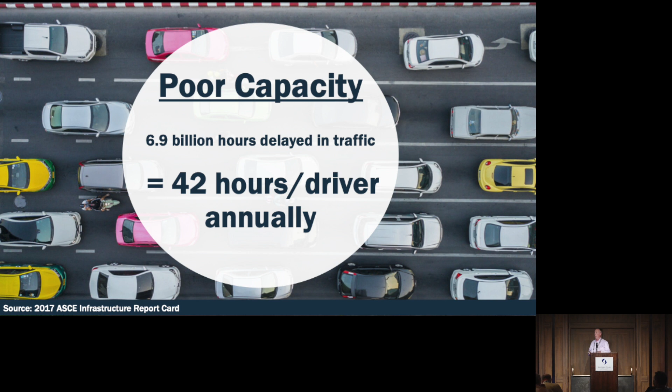According to their research, the average driver spends a little over 40 hours a year stuck in traffic. And I can tell you, I live in the Boston area. It's at least double that there. And the other thing that came out of their research is the average driver is spending over $500 a year on operating costs and vehicle repairs as a result of rough roads. And again, in Boston, it's probably double that. So as transportation professionals, and all of us in this room, I think we should consider ourselves transportation professionals, we need to be thinking about what can we do to change this awful scorecard and this awful grade.

So what are the solutions? Easy to talk about problems. What are the solutions? Certainly one of them, no big surprise, it's going to take a lot more money than what we've been spending. We've underinvested on maintenance. And not much any of us in this room can do about that other than pay our taxes. A lot of those decisions are made by politicians, and we can lobby and do whatever we want, but ultimately our elected officials are going to decide on how much money to allocate. But the one thing I think every one of us in this room can do is do what we can to try to spend what limited funds we do have more wisely.

And what do I mean by spending our funds more wisely? Well, from my perspective, and I think probably a lot of us in here would agree, if we do more preservation, more recycling with a good network optimization, pavement management approach, undoubtedly we're going to end up with better roads for the same or less money. So why isn't there more preservation and recycling? It's a simple solution. All of us in this room know that's the solution. Why isn't there more going on?

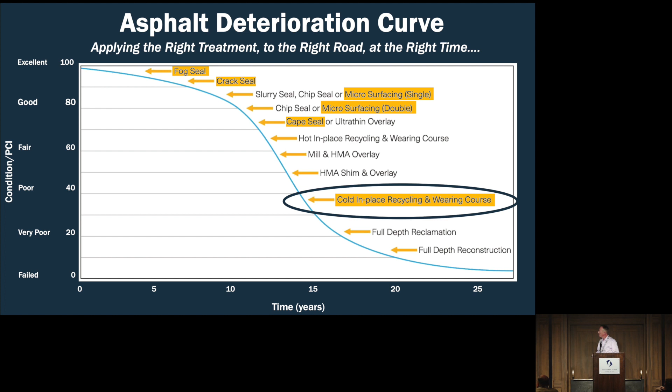And there's a strong tendency to jump right in, digging into researching treatments. But a couple of recommendations before you do that. The first thing, and again, Dr. Brahm, I think, alluded to that. If you go to the About Us tab and click on this Data Methodology tab, you will learn from that tab that the data pre-populating the website and used in a lot of the interactive calculators is data that was collected in a survey in 2017

for 2016 project costs on what we called medium-sized projects, 100,000 square yard jobs for preservation, 50,000 square yard jobs for recycling, with average life extensions. So that's the average data that's pre-populated on the website. That average data probably does not apply to you if you're an agency person, or any of your clients if you're a contractor person.

So it's important to get the most benefit and value from this website to go in and customize it to your region and your costs and life expectancies. We all know that a chip seal in Minnesota or Montana probably is not likely to last quite as long as a chip seal in Mississippi. And the costs are going to be different as well. So we need to make those adjustments. Really easy thing to do.

Go into this, click this tab, create a profile. All you need to do is enter your email address, a password, I think, and what will pop up is this database. This database is a long, long list of pre-populated treatments, and the 3 columns left to right. The first one is unit cost. You can either do US dollars per square yard or Canadian dollars per square meter. So north of the border, you've got that capability.

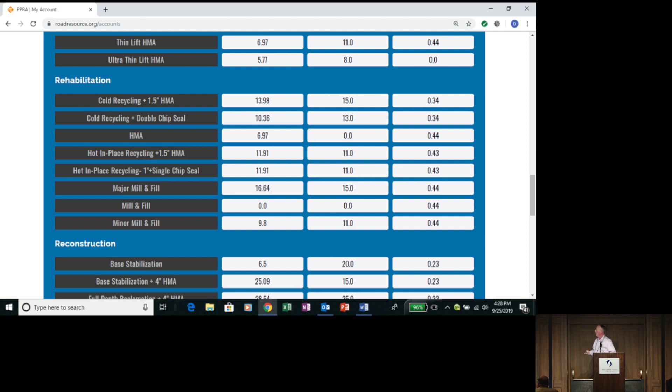They come back to us year over year because they understand the value of the treatments and they just use them year over year. So rather than sell treatments, we try to educate and encourage people to have optimized pavement management plans. And Dr. Brahm touched on it earlier. We have 4 or 5 different network optimization tools, really simple math, easy to use tools. My personal favorite, like Andrew's, is the remaining service life calculator. And I'm going to take you through it real quickly here. Hopefully I don't put you to sleep doing it.

But I'm going to make a bold statement before I jump in. If we can get every agency in this country using this remaining service life calculator every year, the roads are going to get better. I guarantee you. It's a light bulb. It's an eye-opening moment for people when they do this. And let me show you why real quick.

All you need to do to use this calculator is plug in those top row of white boxes, the lane miles in the network. So in most towns in Massachusetts, there are about 100 centerline miles of 2-lane roads. For this example, I plugged in 200 lane miles. Average pavement width in most cases is about 12 feet. And then a budget, for conversation's sake, I've thrown in $1 million here.

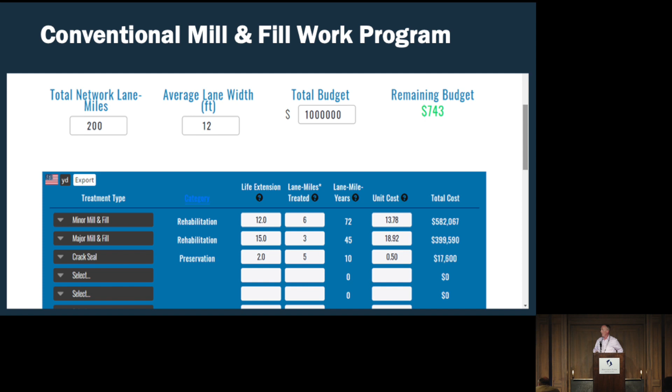So we're a mill and fill market like many others. So for this example, I put in 6 lane miles of minor mill and fill, 3 lane miles of major mill and fill, and with a little bit of money left over, I put in 5 lane miles of crack seal. And I spent down my $1 million budget to only having $743 left. Now, the real power in this calculator is what I'm going to show you next.

Every year they're gone. So if you want that network to break even and not decline, you've got to put 200 lane mile years of new life in. That spending plan that I just showed you, all mill and fill, only added 127 lane mile years, so we lost 73. You can get away with that one year here, one year there, but if that's what you're doing year after year after year, the network's declining.

And how easy is it to illustrate it? Even a politician could understand that. That's the power of this tool. Great communication tool. We need to get everybody using it. So then what we do after they've had this eye-opening moment, realizing, oh my God, I'm digging a hole year over year over year, we go back into the calculator and play around with it a little bit.

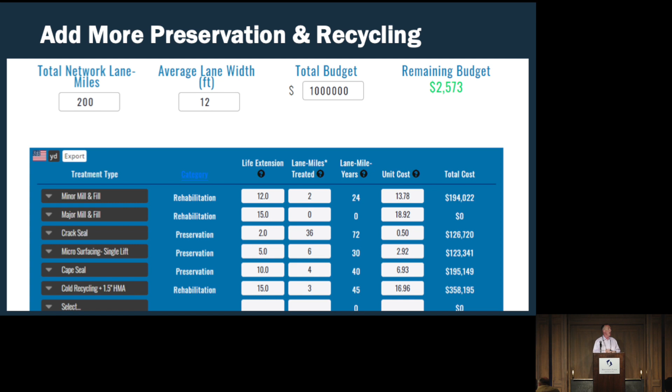So what I did here is I cut the minor mill and fill miles to 2 from 6. I took out the major mill and fill altogether and put in a CIR project. Surprise, surprise, right? We're CIR contractors. I added to the crack seal program, and then I also threw in some microsurfacing and cape seals, and I spent down the same $1 million budget, but now look at the results of this program.

Roughly a 45-55 split between preservation and rehabilitation, but look at the lane mile years. We have a net surplus of 11, so that network is almost a break-even year, slightly positive, but it didn't go backwards. That's what you're looking to do with this calculator. So play around with this with your agency people. Again, it's such a simple tool to use, and how powerful is that?

So the agency guys, you've shown them that, and we played around with some of the other network optimization tools, and they might say, well, you're talking to me about some treatments that I've never tried before. How do I match up the right treatment to the right road? I know that's key to pavement management success. We can't put the wrong treatment on the right road. And you say, well, let me show you a couple of ways you can do that here from this website.

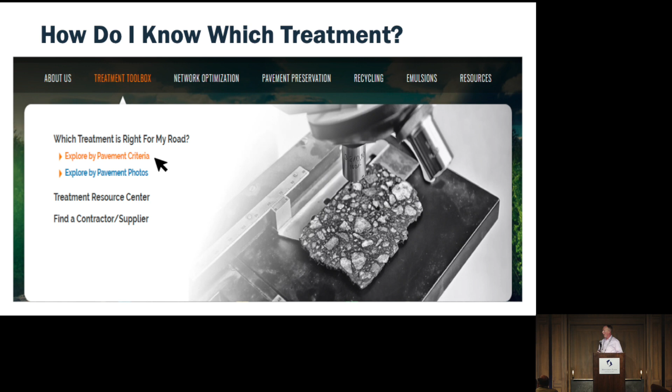And this is under the treatment toolbox. We go to which treatment is right for my road, and we'll click on Explore by Pavement Criteria. When we do that, this ice cream sandwich looking graphic pops up with a big long list of, I think there's 18 treatments over there on the left. And by answering just 4 simple questions in those black boxes across the top, we can narrow that range of 18 treatments to a much shorter list.

So for this example, I said the pavement condition, you get 5 choices here. You don't need to know an exact PCI, just is it an A, B, C, D, or F, like a report card. So I took a C, that's a fair pavement condition. You need to know the primary distress, and I think there's about 20 or 22 in the drop-down menu. For this example, I used longitudinal and transverse cracking, a moderate degree of that. You need to know the road type. Is it urban? Is it rural? Low volume, high volume? Here I used an urban major collector.

And what's the surface type? There's 5 choices. One's gravel, one's concrete. In our area, most everything's dense graded hot mix asphalt. And by picking those 4 choices, you narrow down the list of possible viable treatments on the left, in this case to 4: cape seal, hot in-place recycling, cold in-place recycling, and cold central plant recycling.

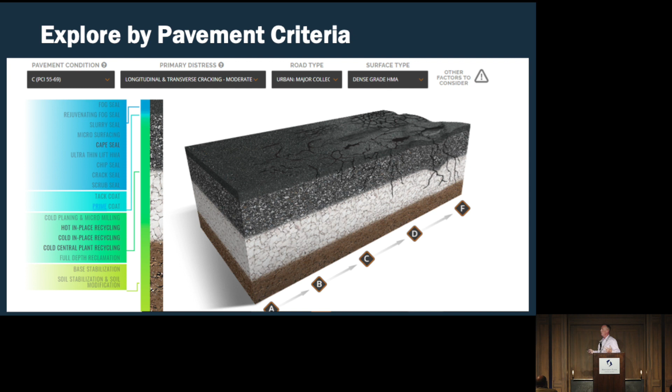So that gives your client a short list of things to consider further. Do I have contractor resources in the area that do all those things? What do they cost? How long do they last? Have people had good success with them? So you've narrowed the field. Really simple, easy to use tool. And there's an even simpler one.

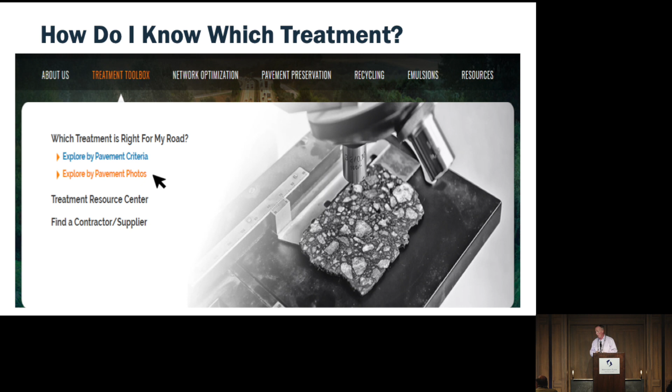Going back a screen to this, which treatment is right for my road, you can also explore by pavement photos. And when you click on that, you jump into this database. I think there's a little over 100 photos now, from really pretty good roads at the top of the list of photos, down to some really poor roads at the bottom. And you scroll down and you simply look for the pavement that most looks like the road that you're considering working on. So for this example here, the one circled in red is what I clicked on.

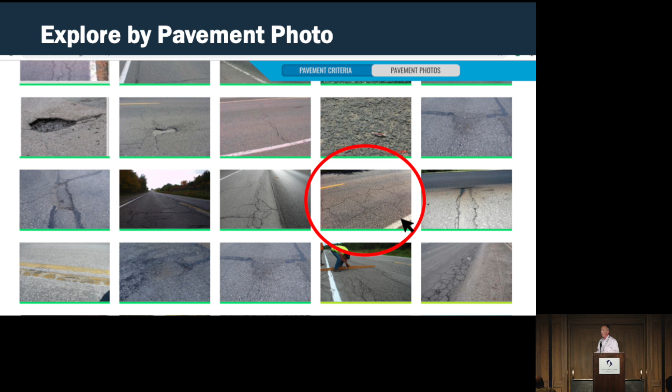It doesn't know whether this is a local road, urban, high volume, low volume. So it includes, in this case, cape seal, chip seal, scrub seal. If in fact this is an urban major collector, we probably aren't going to use those. So then you've narrowed it down to cold recycling or hot recycling, again for the client to look into further. I mean, how cool is that, especially for newer, inexperienced pavement managers? I mean, how simple is that?

So then this prospect or client might say to you, well, that stuff's all good, I appreciate all that, but when I do a 3-inch mill and fill, what we call a major mill and fill on here, I know I'm getting good new structure. This recycling stuff, well, what are you getting for structure when you do this, what do you call it, cold in place recycling or something? And you say, well, I'm glad you asked.

We, in fact, have a structural calculator on the website that through a lot of work of Dr. Cross and a few others includes a whole bunch of different choices for layers, both on the conventional approach and the optimized approach. And for each of those layers, we know we have structural coefficients. So for this example, it was 3 lane miles of major mill and fill. That's the 21,000 some odd square yards. Let's say the conventional approach was that major mill and fill.

If the existing pavement was 6 inches, then we'd be leaving 3 of the existing, and that gets assigned a coefficient of about a 0.2 per inch of thickness. The 3 inches of new HMA is probably about a 0.44 for a total structural number down there of about a 1.92. Whereas over on the right-hand side under the recycling option, you probably are going to pre-mill 1.5 inches because you want to save curb reveal. Then you're going to recycle about 4, and we've got a coefficient of a 0.34 for that, and then put a 1.5-inch overlay over the CIR.

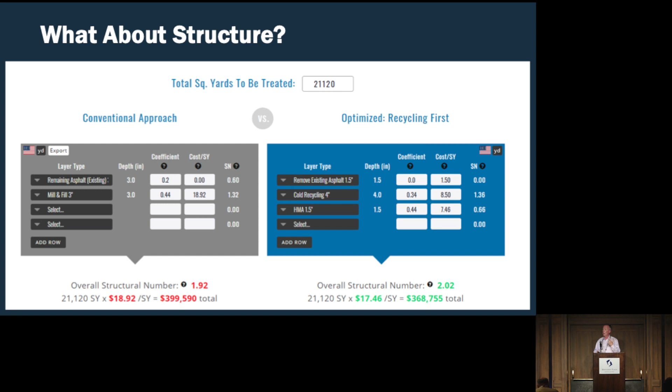Look at the structural number for that composite, 2.02. So goodness, it's a little bit stronger than that deep mill and fill option. And look at the cost down below, about what, 30,000 bucks cheaper. So stronger and cheaper. Pretty compelling argument, huh? So a nice, simple, easy to use tool.

So then the client, again, he's a tough sell. He says, well, geez, that's all well and good, but my board is all over me to reduce the highway department's carbon footprint. So talk to me about the environmental aspects of these treatments. And you go, geez, I'm glad you asked. Let's look at this sustainability calculator. And of course, we all know in this room where that recycling really shines in these environmental features. So again, very, very easy to use.

So then he's a tough sell and said, all right, you've given me all these good reasons to substitute cold recycling for my major mill and fill. I don't know anything about these. How do I learn more? And you say, Mr. Client, the first thing we're going to do is we're going to go out and look at one of our jobs in action. There's no better way to learn about a treatment than seeing the treatment in action. But until we get a chance to schedule that, let me show you some cool things here.

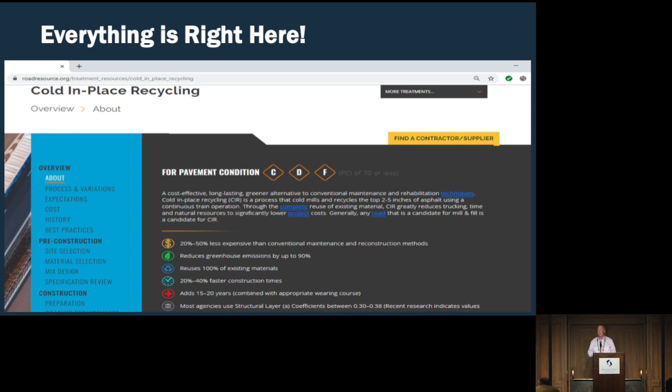From weather requirements, we know that's important, to inspection guidelines. What could be more important to an agency that's never done a treatment? They don't even know what to look for. Here it is. This is what you want to look for. You're putting this guy in a real comfortable position to try doing a project.

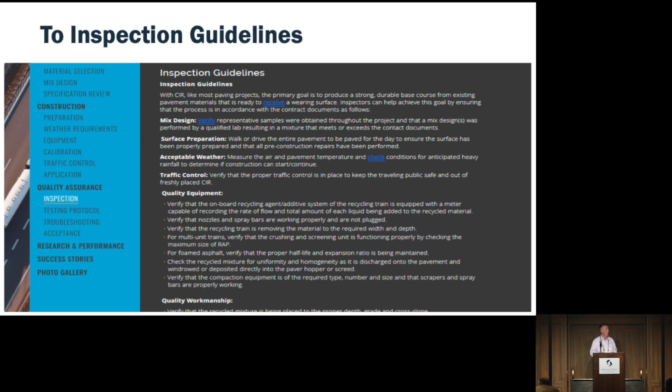Let me tell you something about success stories. Two things about them. One, agency people get beat up all day, every day. They don't get a lot of pats on the back, a lot of praise. Wouldn't you make your client feel really good posting a success story about them on this national website? So all you CIR contractors, let's get some success stories in.

The second thing about success stories is when people read them, they start feeling more comfortable. They say, oh, I know Joe up there in Massachusetts. Yeah, I'm going to give him a call and hear about that treatment. We need your help, guys, getting more success stories on this website.

So in closing, what can all of you do? I've told you what we do as super users to share this site to help grow the use of preservation and recycling. Here's my recommendations to you. I recommend you also become super users. As a result of 2 training sessions done this year, we have a total of 74. I hope we can get at least 74 more next year. You'll be more equipped to go out and use this website.